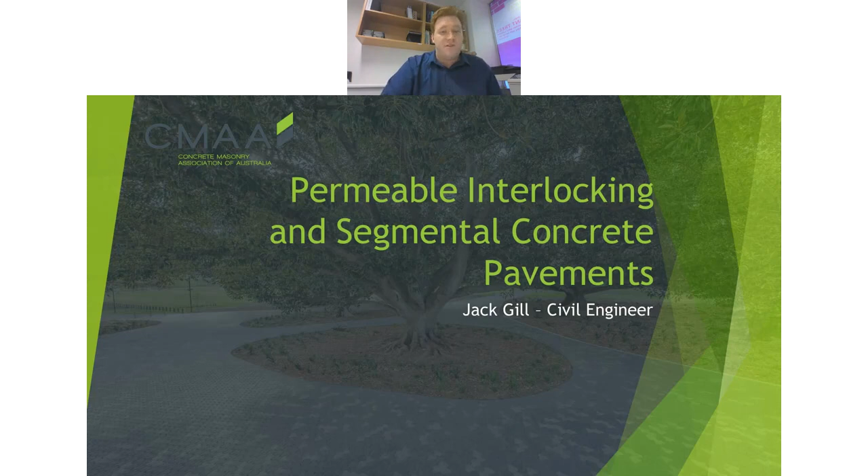So myself, my name's Jack. I'm a civil engineer here with CMAA, and I'm going to be taking you through a little bit about permeable interlocking concrete pavements, about why and how we should be using them, and a little bit about the design and specification of these pavements.

Firstly, I'd like to acknowledge that this is a webinar format, so I'd like to acknowledge the traditional custodians of the various lands from which all of our attendees are joining us today, and I'd like to pay respects to those elders past, present, and emerging across the nation.

So a little bit about what we're going to be talking about today. We're just going to quickly touch on what we do here at the CMAA, what a permeable pavement is and the different types of permeable pavements, why we might be specifying permeable pavements and specifically permeable interlocking concrete pavements, some of their uses, and then we'll go down a little bit into the design and specification considerations - talking about pavement type, material selection, as well as both your hydrological and structural mechanistic design. I'm hoping this will be a really nice overview of where we're up to these days with permeable concrete pavements in Australia.

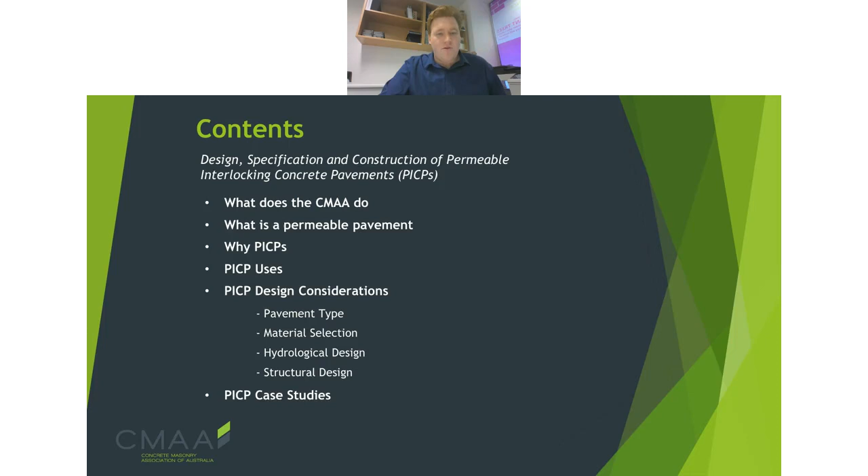So a little bit about who the CMAA is and what our mission is. We are the Concrete Masonry Association of Australia, and we represent all concrete block and paver manufacturers in Australia. It's essentially our job to make it easier to build in block and pavers. We want to develop talent in the industry, we want to facilitate important conversations by having webinars and discussions such as this, and we also obviously want to promote our members' products. And I can see in the chat box a few of our fantastic members have joined in.

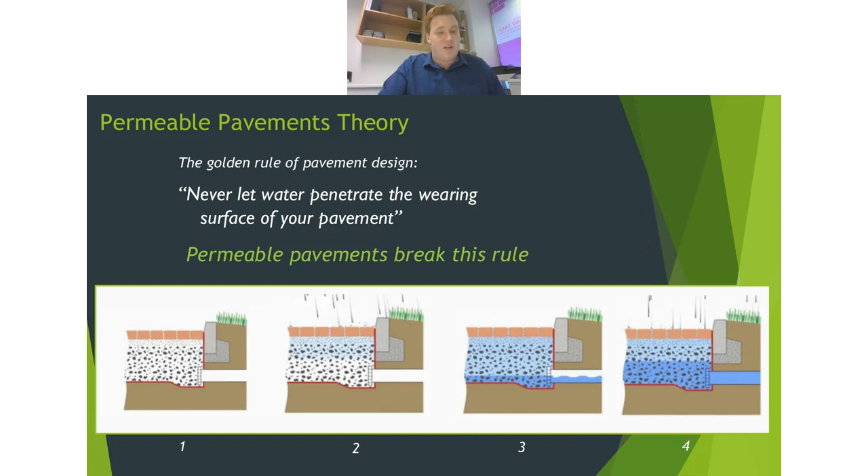So the different types of permeable pavements — there's generally three common types we see here in Australia that are beginning to be picked up. The first type is an open graded or porous asphalt, and as the name suggests, it's an asphaltic material that has some of that finer matter scraped out, which allows water to permeate through that surface.

Similarly, you've got a no-fines or pervious concrete, which a lot of people here would be familiar with, and again it's a similar theory. It's a concrete that's got a higher void ratio to again allow that water to infiltrate through the pavement surface layer.

And finally, we have our permeable interlocking concrete pavers, or PICPs, and that's the acronym I'll use for the remainder of this webinar. Essentially, as the name suggests, we've got a pavement system where the paver layer interlocks, so the units actually tessellate into each other. Either through the paver itself or through the joints between individual pavers, you allow water to infiltrate through that surface layer into the underlying pavement substructure.

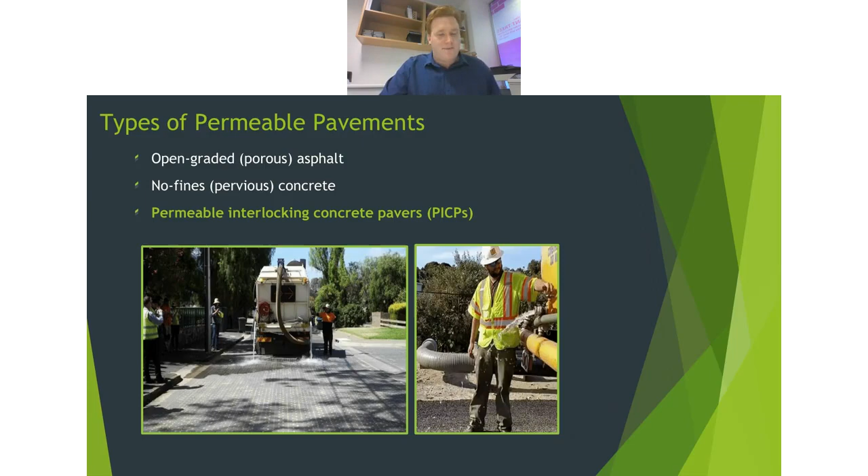So PICPs are a simple and effective solution, minimizing issues of clogging, which I'll get into a bit later, while maintaining the durability of your pavement itself. And obviously durability is massive - our pavements need to take the test of time and last. So this is where, if we think about how we're treating our pavements, these PICP products are likely to come out on top compared to other systems like porous asphalt and no-fines concrete.

I'll refer to an example that's been down for close to 25 years now, Sydney Olympic Park. That was laid on top of marshland, swampland, in the late 90s leading up to the Olympics in Sydney, using a combination of permeable as well as conventional segmental pavers. You can see that with good design, good construction, good specification, and adequate maintenance, you can have a pavement that looks as good as it did the day it was laid - and that pavement is approaching 25 years of age.

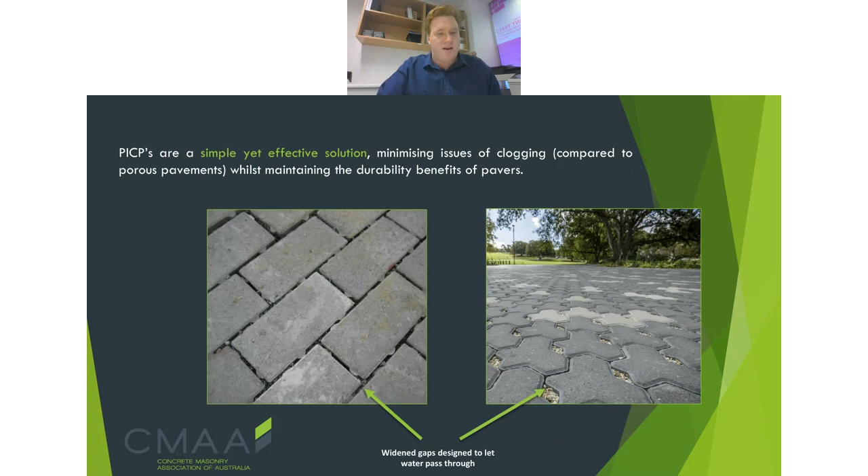So we have a bit of an idea of what a permeable pavement is now and how they function. I guess the next important question we need to be asking ourselves as engineers, as urban planners, as responsible citizens is: why PICPs? What's the win and what's the gain from using these systems?

And again, there's this idea of low maintenance - they are durable products that will last the test of time if designed properly. But I think some of the better benefits here are the idea of environmental friendliness, which I'll speak to in the next couple of slides, as well as the idea of traffic. We want to design precincts, pathways, and urban assets that are safe for people to use. One of the great benefits of segmental pavers is that because of that pre-cracked nature, because of these individual units, you get those little bumps where each joint lays. So as you actually drive over a segmental pavement, it induces vibrations into your steering wheel.

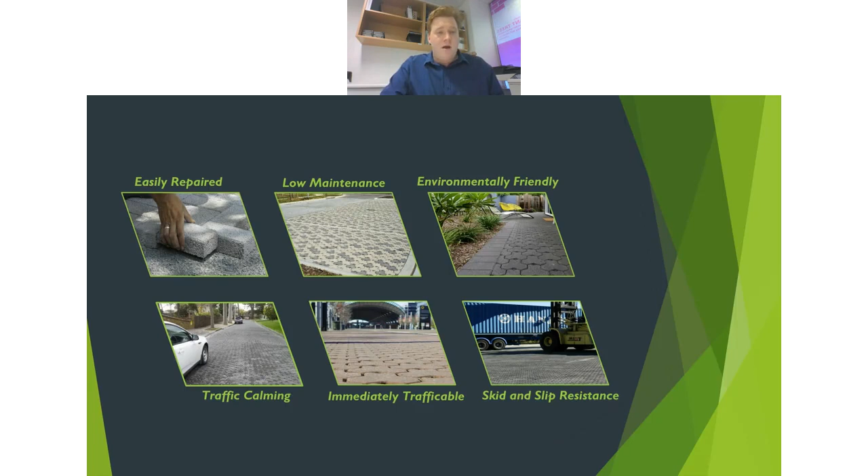As of April, I think we'd broken that. As of July, we're well above that at 1,500 mil. And as of October - still a month ago, and we've had a lot of rain since then - we were at 2,194 millimetres of rain, which was a new record for Sydney. Not a record we want to break, but one we have broken in 2022.

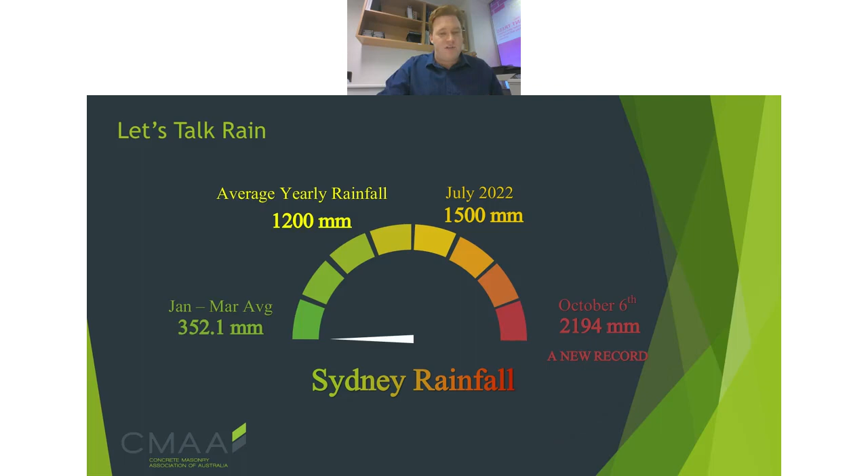So it really goes to show that in areas such as Sydney and Brisbane, we really need to be looking at trying to capture that rainfall, to avoid flash flooding and to be able to service the needs of the growing populations in those cities.

Conversely, in cities such as Adelaide, Melbourne, and Perth, where we don't get a lot of rainfall, we need to be a lot smarter about how we use and store the water that does fall in our cities.

A lot of the time, what happens when it rains in these cities across Australia is that it goes straight into a pit, straight into a pipe, and straight out to the ocean. It's the quickest and easiest way to get rid of that water to reduce the likelihood of flooding. However, that comes with the negative effect of not being able to actually store and use all of that water falling on our cities.

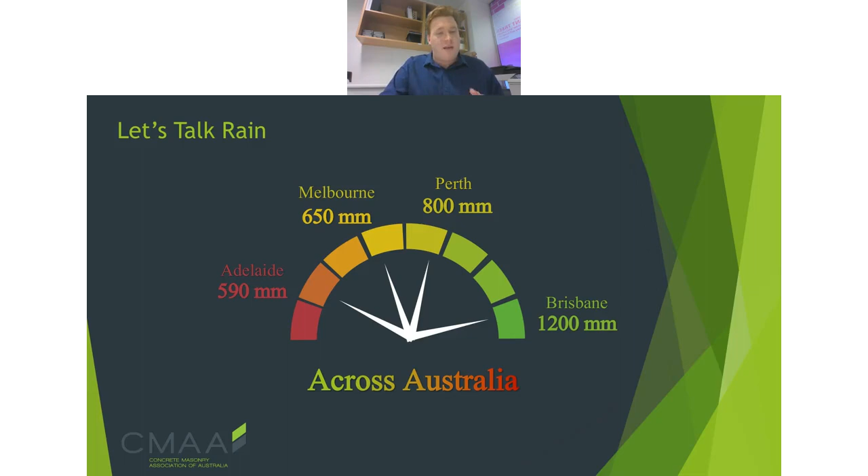So as one mechanism to think about how to be more sensitive with water sensitive urban design, permeable pavements are a key player in that. You can see my point illustrated from a couple of minutes ago.

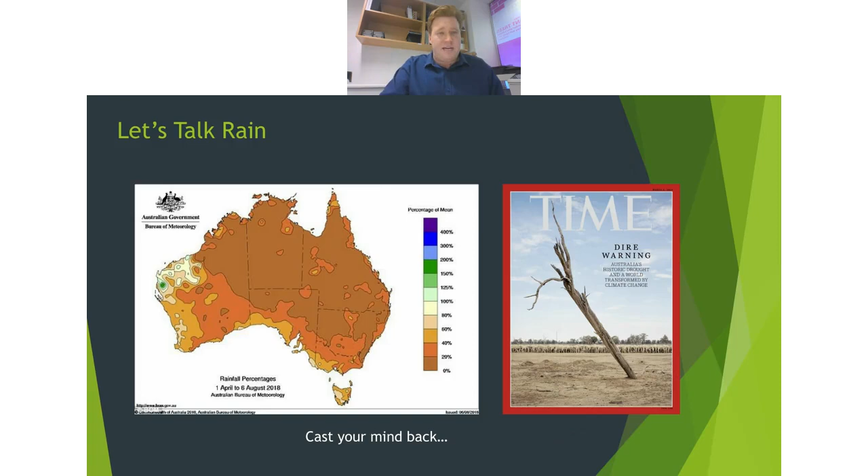If you cast your mind back a few years to the early 2000s into 2010, we actually had those large drought periods - this is in 2018, even a few years ago. And then for the next slide, I had dealer's choice of which photos to use to illustrate the exact opposite, where in 2022 we've had flood event after flood event after flood event.

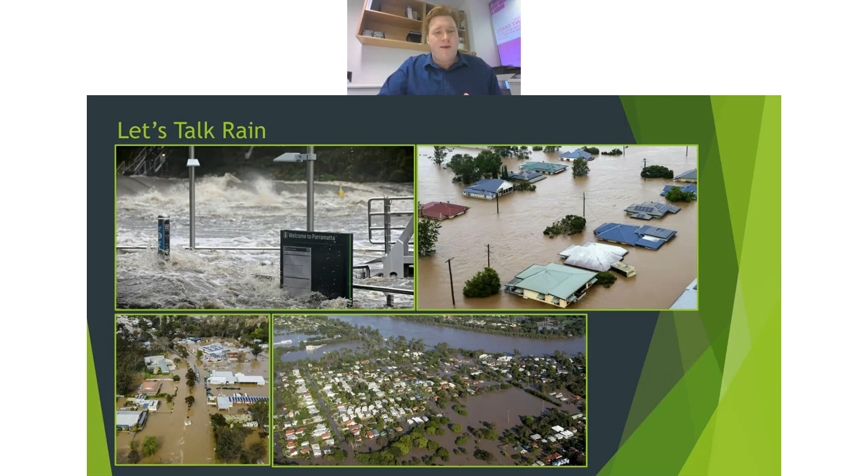So I think as Australians and as urban planners, we need to be a little more aware of how we're designing our cities. Our climate is changing, we're seeing more erratic patterns of weather, and because of that we need to start thinking about different strategies to design our cities in a more sensitive manner.

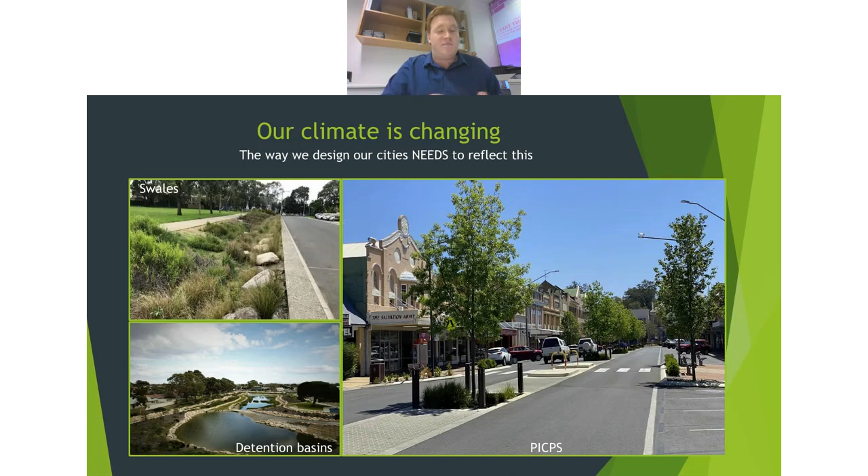You can see here a couple of examples of this: swales, detention basins, but more specifically the idea of permeable pavements. I've talked about the idea of water - I'm not going to delve too much into the idea of improving canopy cover.

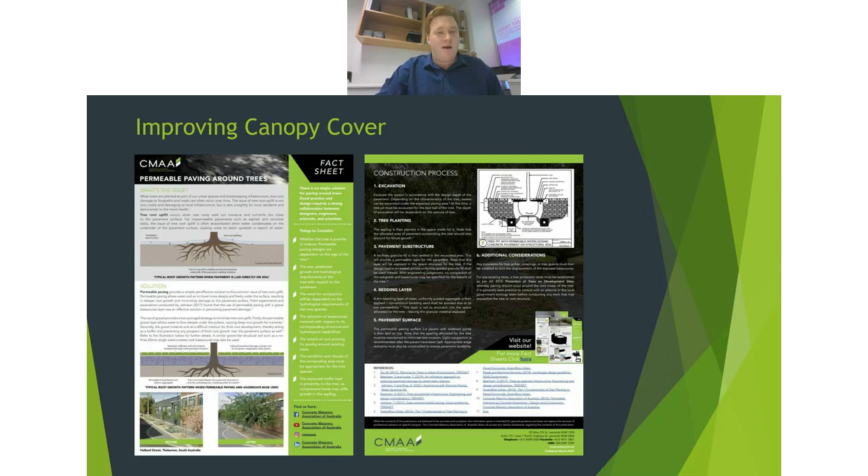This is something we've covered in a previous webinar, and I'm happy to talk about it more in a future one. But there is a really beautiful relationship between permeable pavers and trees. They can actually assist with the growth of trees, which is fantastic for improving canopy cover and reducing the urban heat island effect.

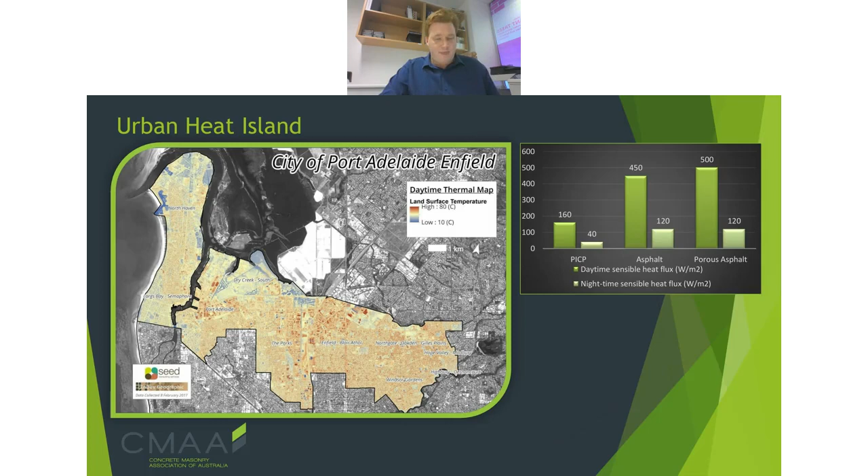So now it comes to the idea of where we can use PICPs and what are the best applications to start thinking about to get these into our communities. I've pulled out a few examples of where they've been used previously - a range of applications from a domestic driveway all the way up to factory and container yards. We've actually seen port facilities built using interlocking permeable segmental pavers. There's one in New York at Howland Hook that's a great example of using permeable pavements in a really high strength scenario.

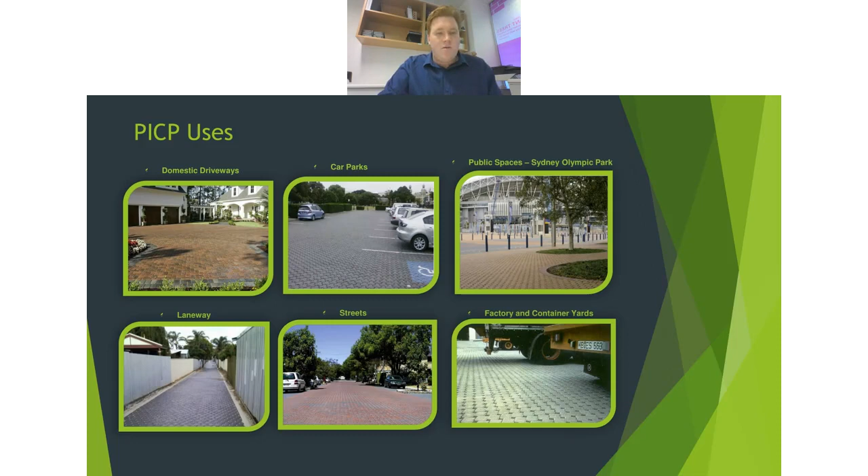So what I encourage you all to think about as a take-home today is what are the low-hanging fruits and opportunities for permeable pavers - not just PICPs, but no-fines concrete and asphalt as well. Because there's really no reason in Australia why we should be designing asphalt car parks anymore. There's a place for these systems where we can use our paved areas as a water-sensitive urban design asset, using that to either reduce and control flooding, improve the quality of our water, or actually store that water for later reuse. So something to think about during the remainder of this webinar.

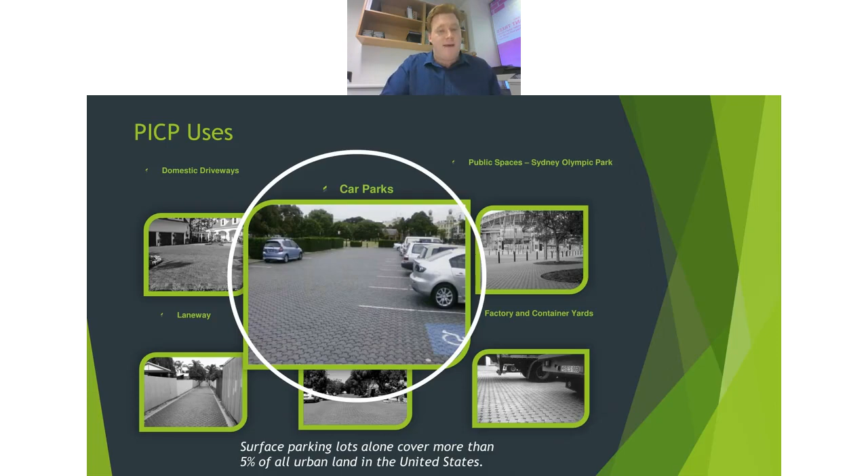So we've talked a little bit about the uses and the why and how of permeable pavements, but now it's time to get into the nitty gritty of how we actually go about designing and specifying these pavements. The first step is to have a look at a flow chart and the engineering design methodology behind pavement design, specifically permeable pavement design.

With regards to our design considerations, there are three key steps we need to fulfill to have a pavement specified and designed correctly. It starts off with your pavement type selection - this talks about your subgrade conditions, your type of cross section, what type of system you like, as well as the pavement materials.

So both your base course material, as well as your actual paver and upper surface layer material. We then would go down into your hydraulic analysis, as well as your structural analysis.

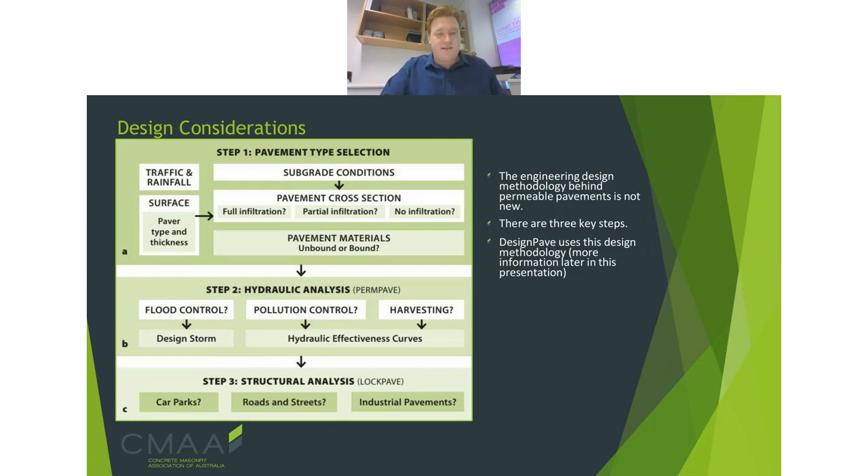So we're going to look at step 1, and we're going to look at subgrade conditions, as well as your pavement cross-section. The reason I've circled both of these options in this flowchart is that they really come hand in hand. A lot of the time, your subgrade or soil conditions will dictate the type of approach you'll use with regards to a PICP system.

Now you can see on top of the screen here, there's 3 key types of systems that we can employ here for a PICP. There's a full infiltration system, a partial infiltration, and a no infiltration system. As engineers, we like to keep things easy to understand, and the definitions for these are quite inherent to the function that they perform.

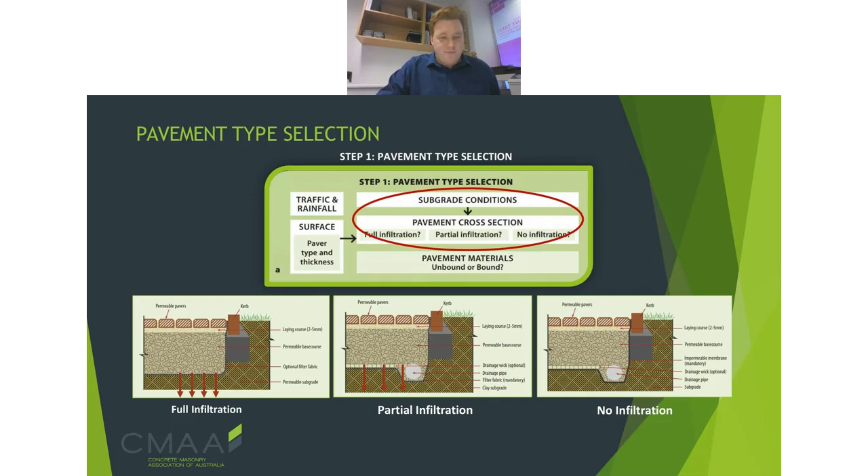So as a first step, we can look at our full infiltration PICP system. As you can see here on the screen, and as the name suggests, the idea of these systems is that we don't actually have any subsurface drainage infrastructure. What ends up happening is that any water that enters that pavement system through your upper layers will translate through your bedding material, through your base course, and back into your underlying subgrade.

The beauty of this system is that you don't actually have to have that drainage infrastructure. You don't have to put in your pits and pipes. Another beauty of this system is that it goes straight back into recharging your groundwater resources. So if that's a concern, then that's something these systems can be used for.

And you can see the final dot point underlined on this slide is that these are used when you've got a subgrade that's a non-cohesive granular material, so something such as a gravelly or a sandy soil. I'll get a little further into that in more detail as we progress.

You can see the different pieces of the pavement in this cross section here. You can see the actual pavers themselves, the base course, the laying course. You can see the subgrade, which is your underlying soil, and you can see your kerb on the right-hand side as well. I'll speak to all of these as we move through the design.

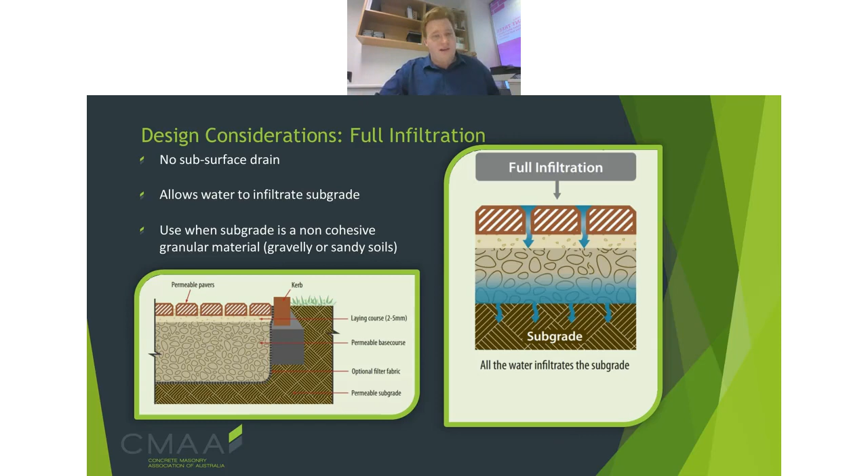Your next type of cross-section that you could opt for if you're specifying a permeable pavement would be a partial infiltration system. Again, as the name suggests, this allows for some infiltration into the subgrade, but it also allows for some water to be captured and either stored or pumped out of your pavement system. You can actually see that in these cross sections that we've got on screen here.

You can see that the key things you'd note is that you have a permeable geotextile or a sort of filter fabric that allows you to separate your base course material from your subgrade material, but that also still allows that water that's in your pavement cross section to get through to your underlying soil.

What you also have here that's different to the previous slide is that you have a pipe, and in some cases, a pump as well that can be used to pump out or take out that water and reuse it for an alternative application.

So what we generally mean by that is we'll insert a slotted ag pipe at the lowest point or at the bottom of our permeable pavement cross section. What ends up happening is you get this twofold movement of water, or two pathways, where one of them is that water going down into your subgrade, and the other is that excess water that you don't want going into your subgrade getting removed via that pipe.

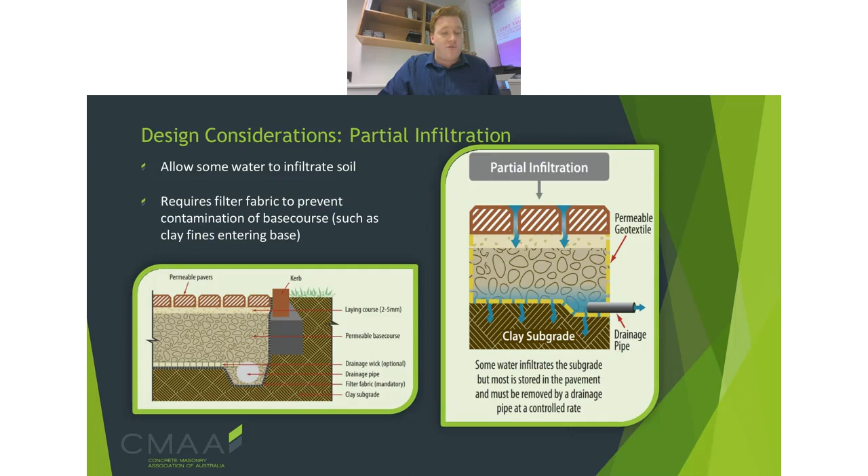You can see these will be used in some clay soils as well as some sandy soils. But you'll see where the difference lies over the next slide for your no infiltration system. And again, as the name suggests, for a no infiltration PICP system, you have an impermeable membrane that basically borders your whole system, and this doesn't allow any water that enters your pavement system to exit into the surrounding subgrade.

And so this really, if we're talking about analogies, this really is almost like the bathtub that I was referring to at the start of this webinar.

You get basically this detention basin essentially that can store this water, and then you insert your drainage pipe or your pump, and this essentially takes away all of your water that enters this system. You can take that away to a different part of your stormwater infrastructure, or you could take that to a tank and use it to water your gardens, water your footy ovals, as a nifty way of recycling any water that enters that system.

So where you might use a no infiltration system is where you've got contaminated soils or where you've got expansive soils, such as your highly reactive clays. That'll just mean that you don't have that water or excessive moisture entering that soil to cause that heave and cause that expansion and contraction.

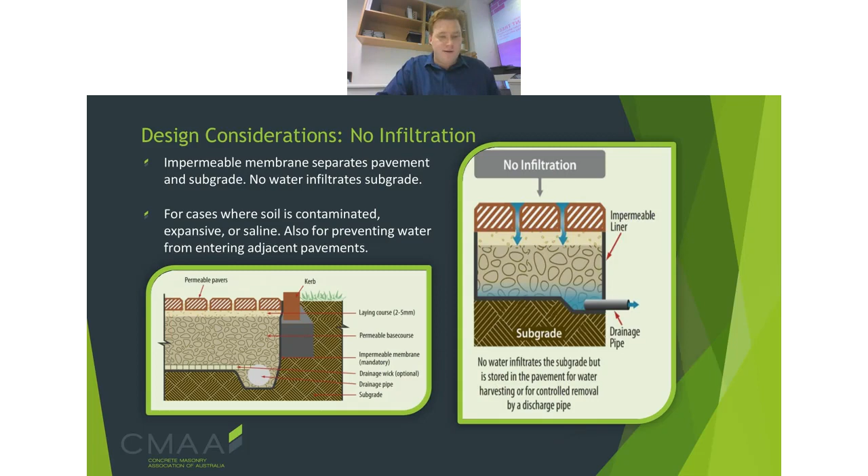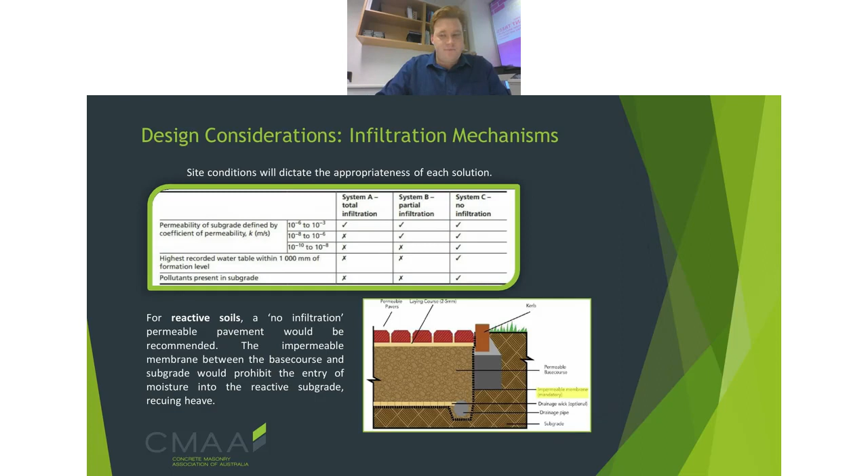You can see a little bit of an idea of the different types of subgrades that we might come into contact with when we're looking at designing our pavement. I mentioned that these subgrades are very much related and inherent to the type of permeability of your subgrade, as well as the type of system you'll specify.

In those scenarios, it might be completely fine to specify a full infiltration system, and that can obviously save you a lot of money depending on what you're attempting to do with your permeable pavement system.

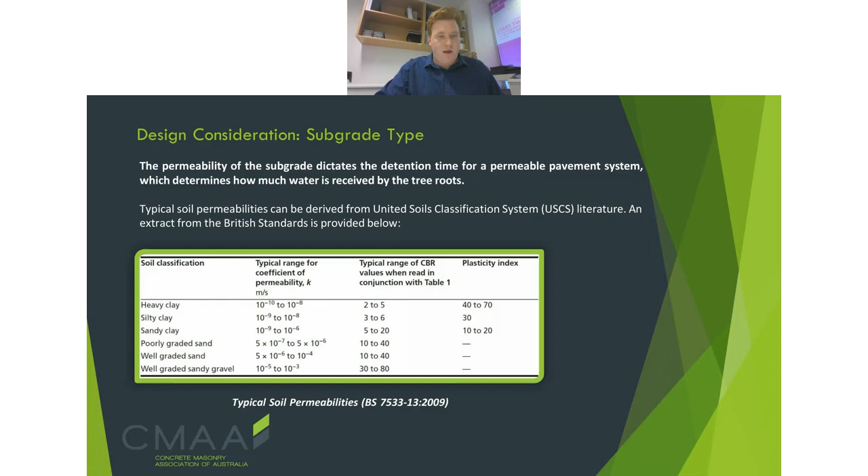In terms of pavement materials, we've talked a little bit about our subgrade conditions and our pavement cross-section and the different types of cross-sections we can opt for. Now it's time to talk a little bit about pavement materials itself.

Within a pavement, you obviously have your base course, you have your bedding course, you have your actual surface layer or your pavers themselves, and you have your jointing material that actually is poured between all those joints within the individual pavers. All of these things are really important to think about, and they do differ quite a lot from your conventional segmental pavement. It's really worth taking note of the different types of choices you'll need to make with regards to pavement materials.

First thing I'll talk about is this important relationship between strength, compaction, and void ratio, and the idea that as your base course strength increases, generally speaking, your void ratio decreases. That means that your ability to hold water decreases. Similarly, if you have a high void ratio, you will be able to hold more water that enters that system, but you won't have the associated sub or base course strength that you might desire.

So again, it becomes a bit of a balancing game between picking a base course material that can hold the amount of water you want to enter the system, but also be strong enough from a structural perspective to actually withstand all of the traffic loadings that your pavement is going to be subjected to.

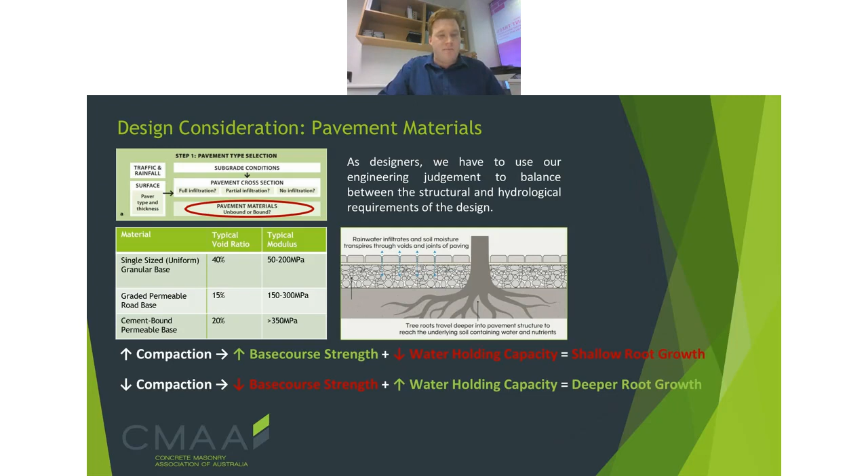We get a lot of questions here at the CMAA about whether, if you're not able to source this exact grading, you can use an alternative grading or an alternative base course material. The answer is absolutely—provided that material is strong enough and can hold the amount of water that you need it to.

I know we've had some questions, particularly from people in Perth, who have struggled to find this grading. So the answer is, if you have different materials available, you absolutely can use those, but you just need to have a look at how that's going to perform from a strength as well as water holding capacity perspective.

You can see there's a variety of materials here as well—it's not just your single size granular-based material. You've got different materials, including your cement-bound permeable materials that can be used as a base course material. It's dependent on what you, as a designer, want to specify for that pavement.

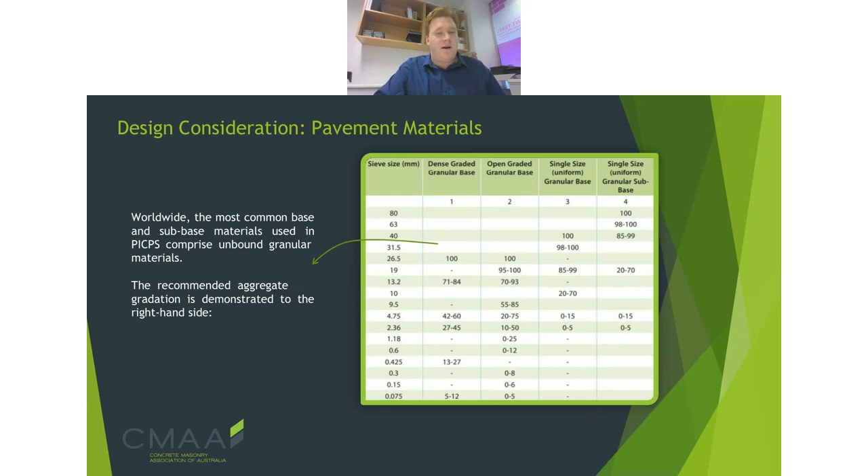By trafficable, I mean if it's going to have vehicles using that pavement. For different materials, for your subgrade, you'll need to compact up to 92 to 96%. For an unbound base material, you might need to compact to 98%.

What I will say is that, as I mentioned before, there's a relationship between permeable pavements and trees. If you're looking to have trees growing adjacent to your permeable pavement, you might find that this value may need to change to allow that tree to grow healthy roots. As a designer, it's up to you to determine whether or not you can get away with having less compaction for that tree.

But generally speaking, this is where, as someone working at CMAA, I'd say you can have a look at that and maybe come up with a novel solution—where you have a pedestrian pathway adjacent to these growing trees, next to, let's say, another permeable pavement that's actually compacted for trafficked applications.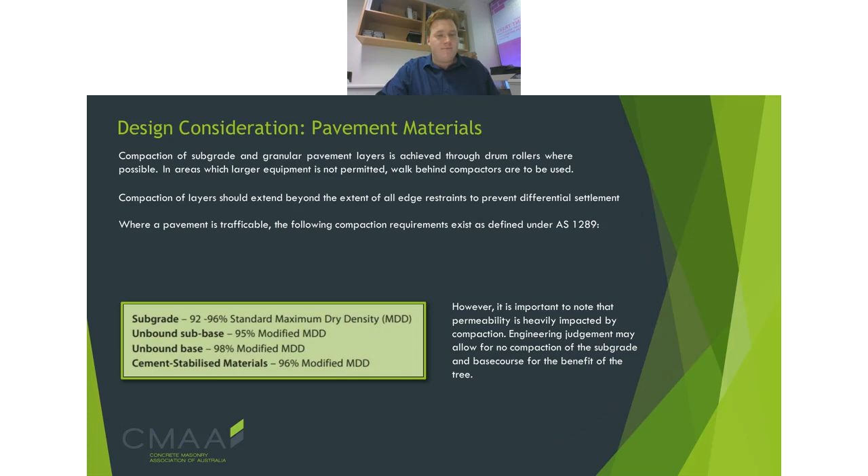So we've talked a little bit about pavement materials and some of the types of materials we can use for our base course, for our structural base course that will often form the base of our structural system. But obviously that's only a small portion of the system itself. We need to think about the actual pavers and we need to think about the bedding and jointing material.

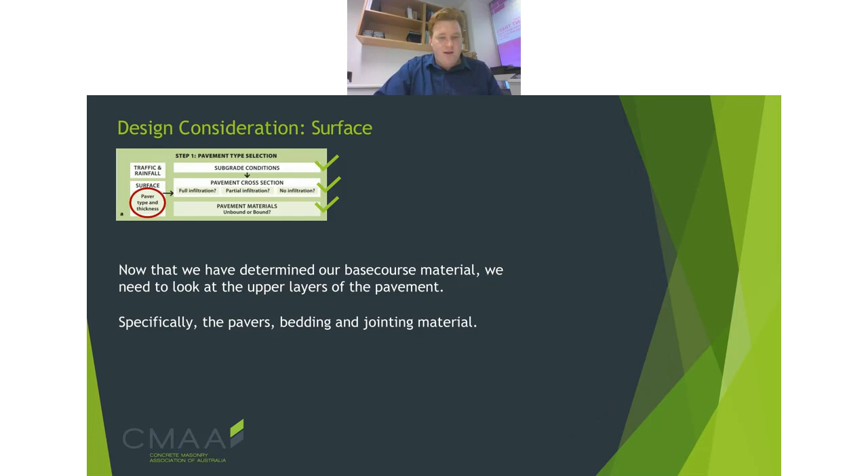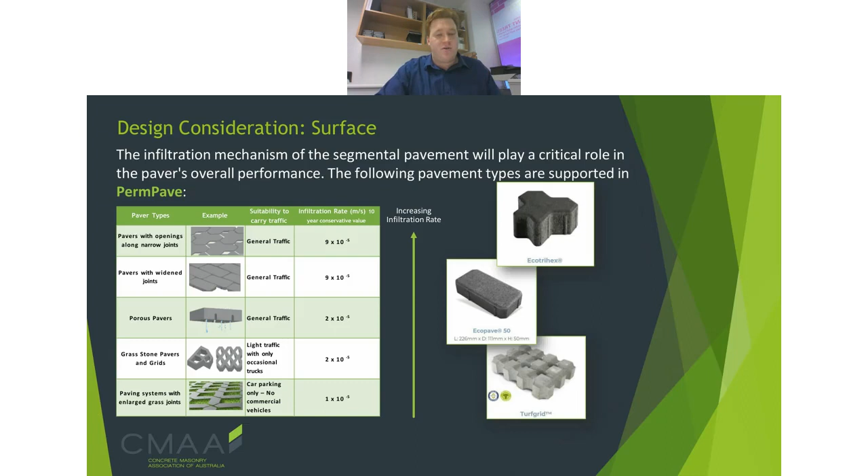You might think, if you're designing a pedestrian pavement, that's fine, I can use a 40 mil paver. But I urge you to think about whether that pavement will ever need vehicles on it, whether that's to clean it, sweep it, or for emergency vehicles. If you're ever going to have a vehicle on that pavement, then generally speaking, that's now become a trafficked pavement, and you'll need to select the appropriate thickness paver for that application. So just something to be aware of when you're looking at what a pedestrian versus a trafficked pavement actually is.

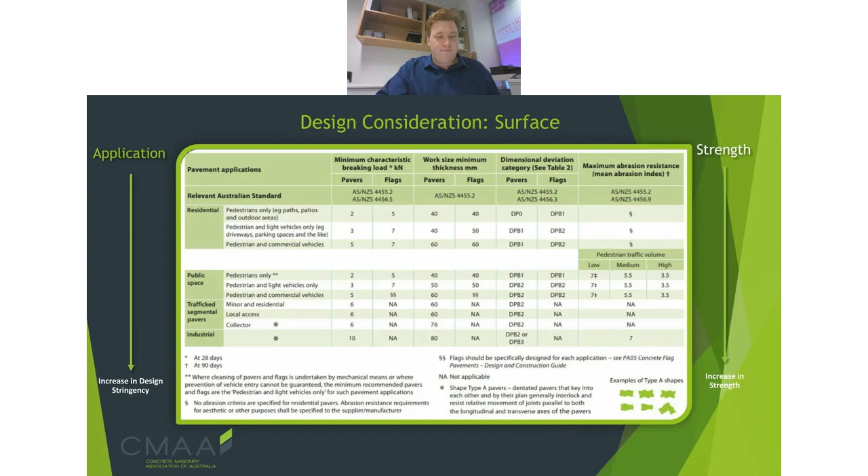Now, the next thing to consider, once we've got our base course material and our paver material, it's time to think about bedding and jointing. Bedding material is essentially the material that you will lay your pavers on, the material they sit on. Jointing material is that material that will fill each of the individual joints between the pavers. Generally speaking, a 2 to 5 mil uniformly graded aggregate is what we'd recommend here at the CMAA for a permeable pavement. For jointing material you could also use the same, or you might use a 1 to 3 mil aggregate, which has been popularly used in Europe.

My one piece of advice here, if you take nothing else from this slide, is do not specify sand in your jointing or bedding material, because sand doesn't have the void ratio necessary to quickly absorb that water fast enough to get into your pavement system. That essentially becomes the point where your pavement will clog up and cause pooling on the surface. So remember, in a conventional pavement it's fine to use sand for segmental pavements, but for a permeable interlocking concrete pavement, you need to use an aggregate, because that will give you the required infiltration to get that water into the system.

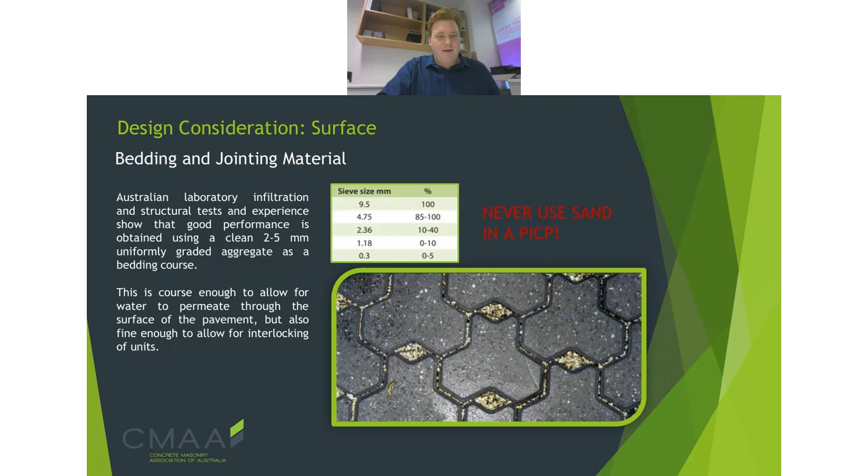Now, a common question we get here at the CMAA, my number one question, and it's a great one, is: will they clog over time? Will your permeable pavement in those upper layers, as leaves fall and people drop cigarette butts onto the pavement, will all those small gaps eventually become clogged up with organic material and pollutants, so much so that it won't be able to infiltrate that water fast enough into the base course?

That conservative value at the 10-year mark is what we actually use as our ongoing infiltration rate for pavers when designing a segmental pavement. What happens is that when you lay the paver, during the first year it's actually overperforming by a very high degree, and then over time it'll slowly naturally clog up. But that's not taking into account any maintenance. If you're sweeping your pavers every 6 months to a year, that value immediately goes back up to its peak infiltration rate, or close to it. So the answer is, if you design for a conservative infiltration value, your pavement will perform above that value at all times and you won't get that associated clogging.

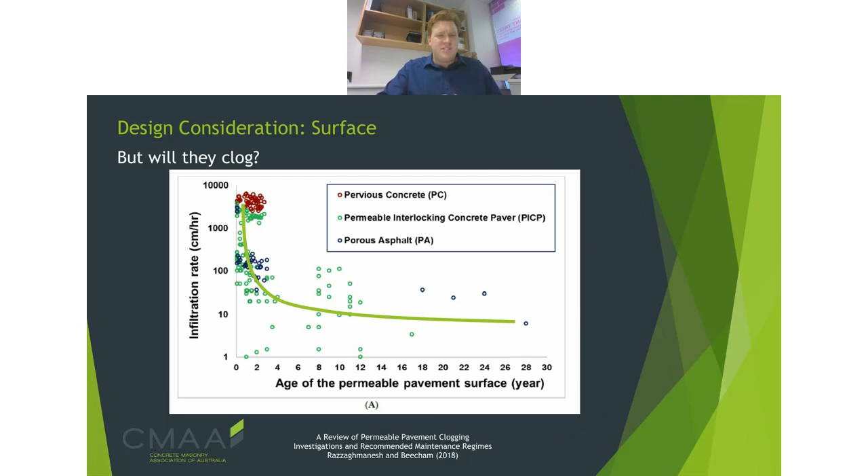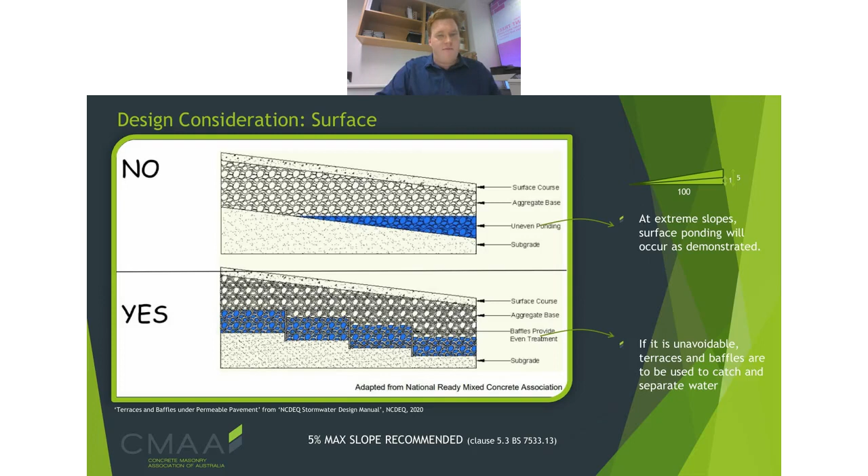Another thing to think about with regards to surface is a sloped pavement, and how we treat a sloped permeable pavement. This is a great example from the National Ready Mixed Concrete Association in America, showing what you can do with a sloped permeable pavement. You can put in barriers that separate and mitigate uneven ponding in your pavement surface, using terraces and baffles to separate that water outward. As a general rule, we recommend a 5% maximum slope, and anything more than that, get design advice to determine if the system is feasible. Generally, anything between 1 to 5% slope is permissible for a permeable pavement and is quite easily achieved.

So we've done our pavement type selection now, going back to our flowchart. Now it's time to think about our hydraulic analysis and talk about what our system's actually trying to do. There are 3 options of what a permeable pavement can specifically be designed to do: flood control, pollution control, and water harvesting. I'm going to touch on all of these.

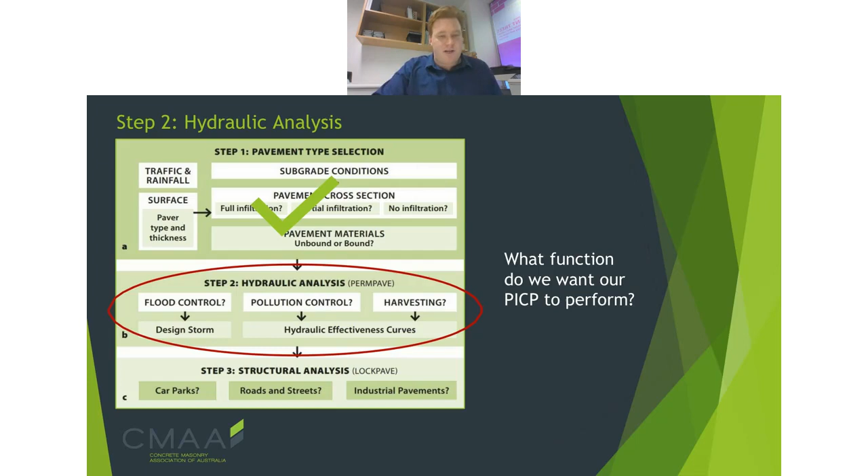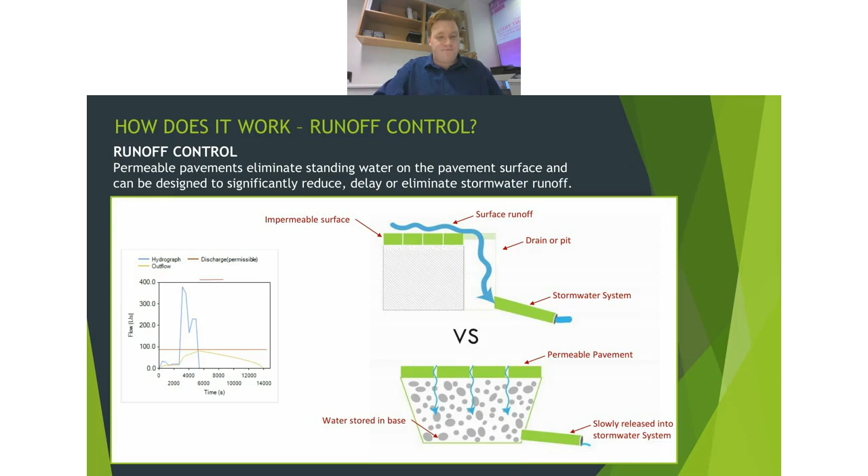Second is water quality improvement. All local government areas in Australia now have water quality targets they need to meet with regards to water pushed out into stormwater systems or reservoirs. The idea of a permeable pavement, specifically a PICP, is that it works through mechanical filtration. The water falls down your pavement system, and pollutants like small TSS, nitrogen, and phosphorus attach onto the sharp angular pieces of base course material, so you end up with cleaner water coming out the other side - think of it like a Brita filter. Any pollutants that remain in the base course can be broken down through bio-organic action, so you end up with a big water filter. Depending on the pollutant load you want to reduce, you can alter the thickness of your base course and the length of your filter to reflect that.

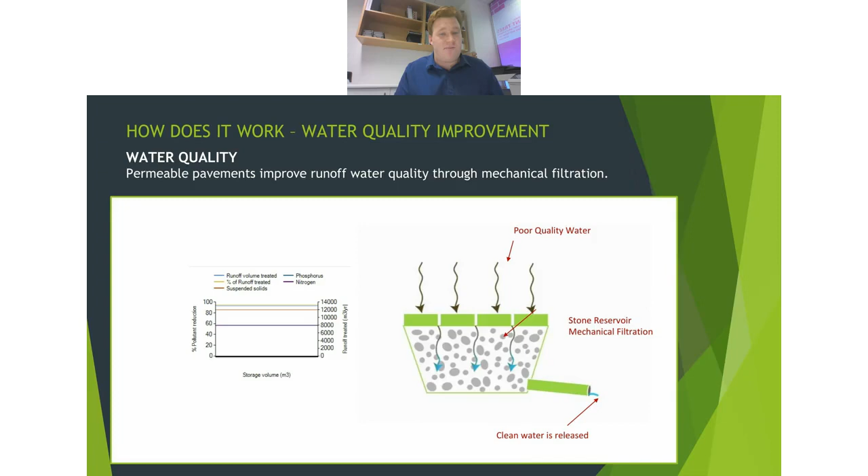And finally, water harvesting. The idea of this one's pretty easy to understand. Your pavement system is your storage tank, and it takes your water, and then you can pump that out and use it to put into a water tank and water your gardens and water your ovals. The thickness of your base course determines the actual amount of volume that your system can store, so you can alter that to fit your water demands.

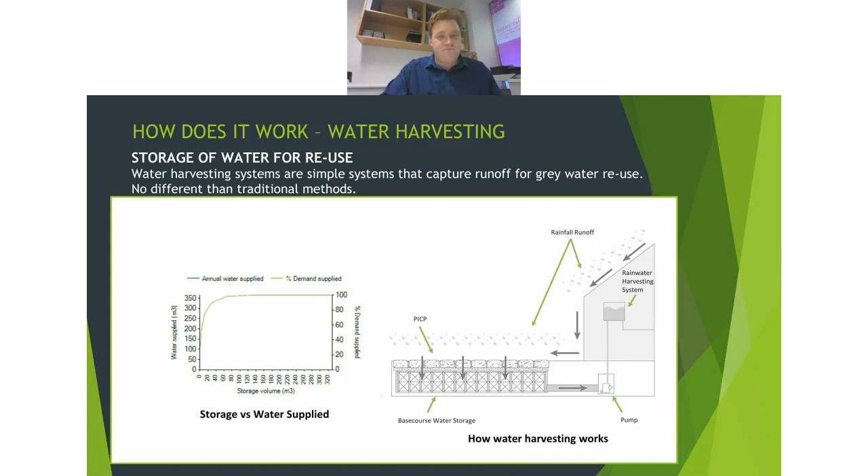The great thing about all three of those different types of systems is they actually work in combination with each other. You can design a system specifically for one of those, but inherently it's going to perform pollution control and harvest water at the same time as reducing the likelihood of a flood event. The beauty of all three is that there's software available you can use to design those, to determine what your base course thickness is going to be.

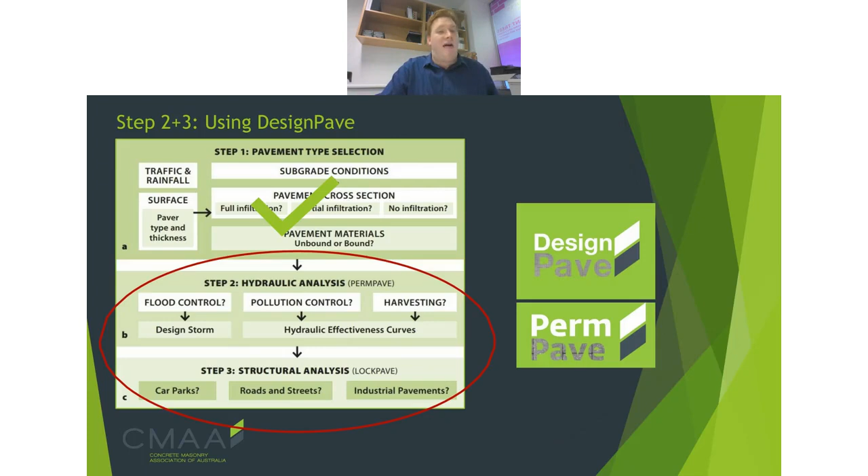In the interest of time, I'm going to go through Design Pave and Perm Pave in an expedited way, and give you an example of how it might work for a runoff control option. If you remember going back to step 2, there's flood control as an option for what your pavement function can perform. I'm going to show you how that might present itself and how that might look.

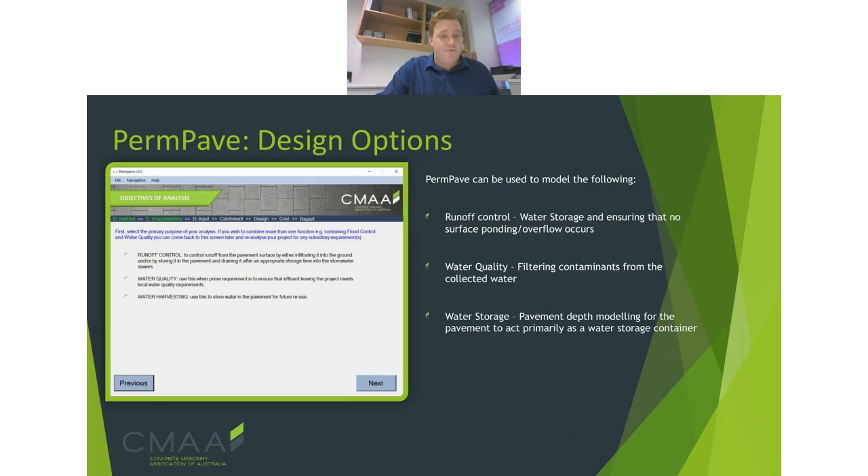You can see here on PermPave, the software gives you all three of those options as your main hydrological testing methodology, so you could select runoff control. Essentially it uses data from the Australian Rainfall and Runoff Guidelines, and it'll use your IFD curves from, at this point in time, the major capital cities of Australia. In future revisions of the software, we're hopefully going to have IFDs across the whole country. You can use those to assess what sort of design storm your pavement needs to withstand and how thick your base course needs to be to withstand that amount of rainfall.

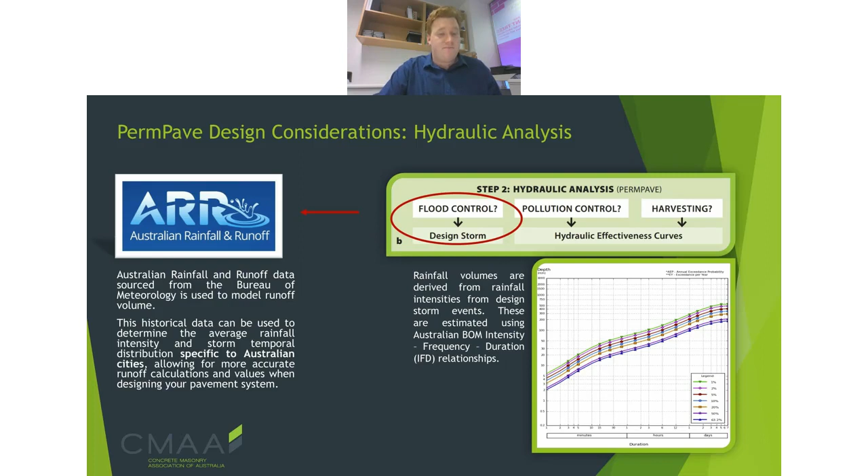The design methodology is really quite simple if you break it down. It's basically a bucket with a hole in it methodology. So you're filling a bucket and it has a hole in it, and the idea is that you want this bucket to be large enough so it can handle all of the inflow while still being able to have that constant outflow and not overflow. If your bucket overflows, your pavement has pooled and your pavement has failed. That's the methodology the software uses to model the pavement.

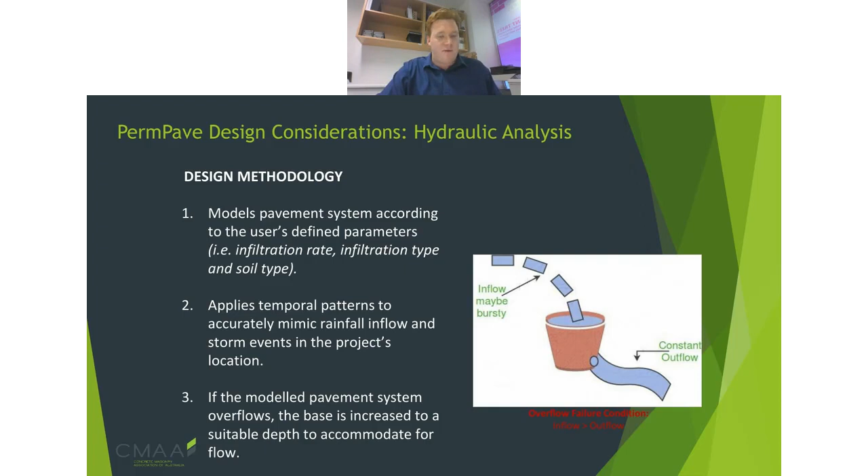You can see some screenshots here of how it works. And again, if anyone wants a demonstration on DesignPave and PermPave specifically as a next installment of this webinar series, that's something I'd love to do, so feel free to let me know.

You can enter some of your different storm durations, and you can enter whatever your target peak outflow is, or you can enter a runoff coefficient, and it will test your pavement inputs. It'll test whatever pavers you've put in, whatever base course material you've put in, whatever bedding course you've put in, and it will tell you whether or not your pavement will perform from a hydrological perspective. And if it fails, it will tell you to go back and adjust those parameters so that it will actually work and you won't get that pavement failure.

The same is true for both the water harvesting as well as the water quality. You'll input your parameters for your thickness, your target coefficients, if you're reducing your pollutant loads or trying to store a certain amount of water, and it will tell you whether or not your pavement's going to perform from a hydrological standpoint.

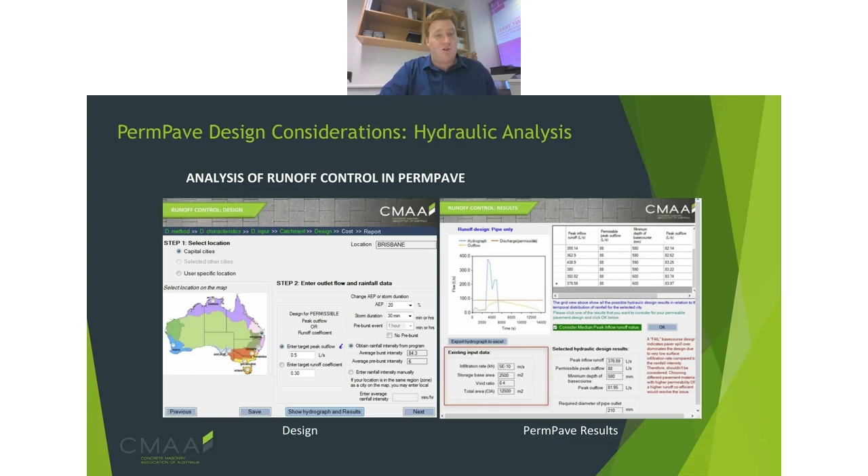Again, you can see a bit of a summary of that. This is that same hydrograph that I pulled earlier, but you can see that the goal, regardless of the hydrograph, is to ensure that the outflow never exceeds the discharge. That's that idea of the bucket with the hole in the bottom. If you achieve that, then your pavement will work for that given design storm and it will perform for that given design storm.

Depending on the type of asset you're designing, whether it's a driveway, a car park, or a road, you might have different design storm conditions, different exceedance probabilities that you'll need to take into account. The beauty of the PermPave system is that it takes into account all of those different exceedance probabilities to allow you to calculate for different types of assets.

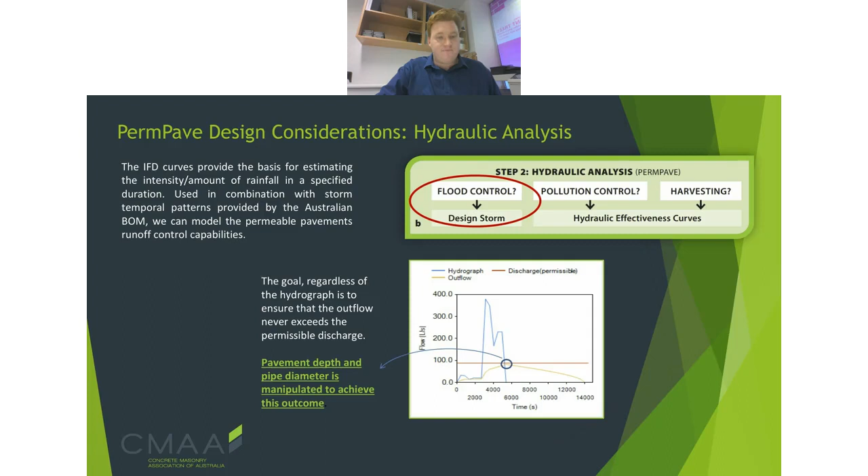The last thing to think about with regards to runoff control is that you don't actually have to have all of your pavement area be permeable. If we think of permeable pavements like a drain or a bathtub, this diagram in the bottom right sums it up really well. You can actually have a large area of impervious pavement, whether that's asphalt, concrete, or conventional segmental pavement, and have that all directed onto your permeable pavement.

The beauty of this is that you can use some really easy equations to calculate the volume of water that would fall onto that area, and PermPave actually does that for you. You can enter what your areas are, and it will tell you whether your system can withstand those different amounts of rainfall, depending on your ratio of impervious to pervious areas.

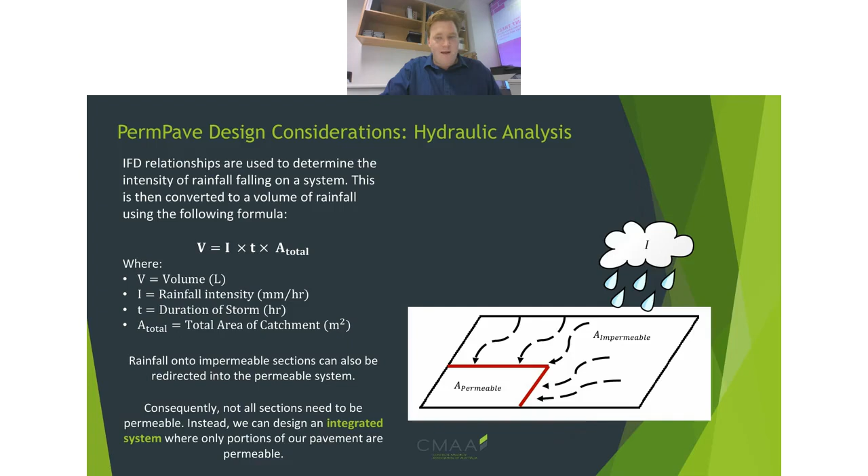As a rule of thumb, there's a recommendation that your ratio should be about 2 to 5, pervious to impervious. You might have a footpath directing onto a segmental permeable pavement that absorbs all the water from both. But you could really alter this ratio to whatever you wanted, provided you get a system that can withstand the amount of water falling onto it. So you can play around with those different volumes and determine what's actually going to work.

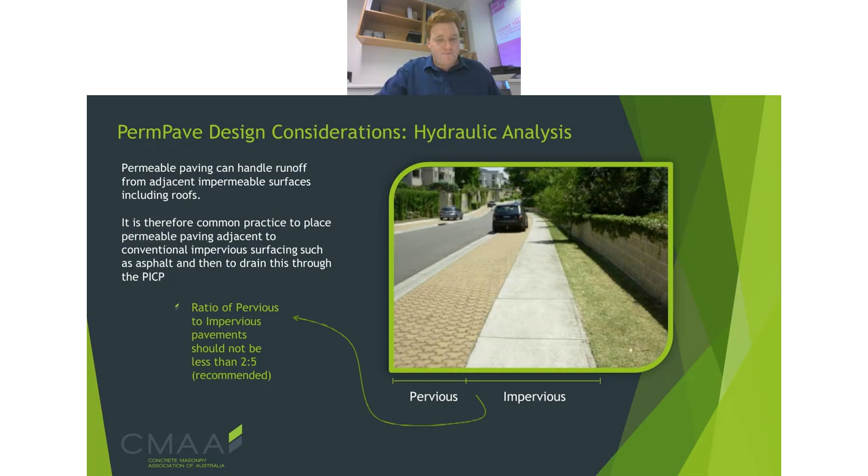As a final step, we've talked about our hydraulic analysis, and we know that our pavement works from a hydrological standpoint. Now we need to make sure it performs from a structural standpoint, and that it's going to withstand all of the loadings that are going to be placed or imparted onto the pavement.

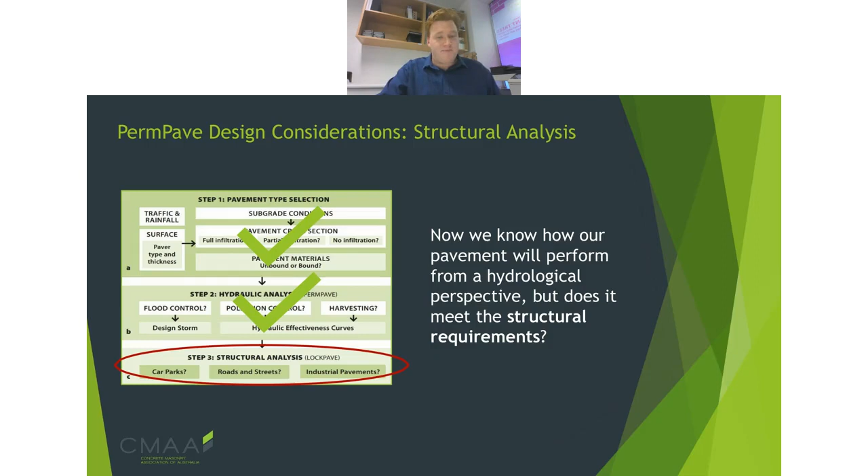Permeable pavements are generally modeled as flexible pavements. This means the deformation applied locally is going to be distributed to a much smaller section compared to a rigid pavement, such as concrete pavements. These diagrams showcase how those loads are actually dispersed onto the surface layer of a segmental pavement, and this is the same for impervious as well as permeable pavements.

You can basically understand that the larger the depth of your base course, the greater the zone of influence, which means you have more capacity to withstand those heavy loads.

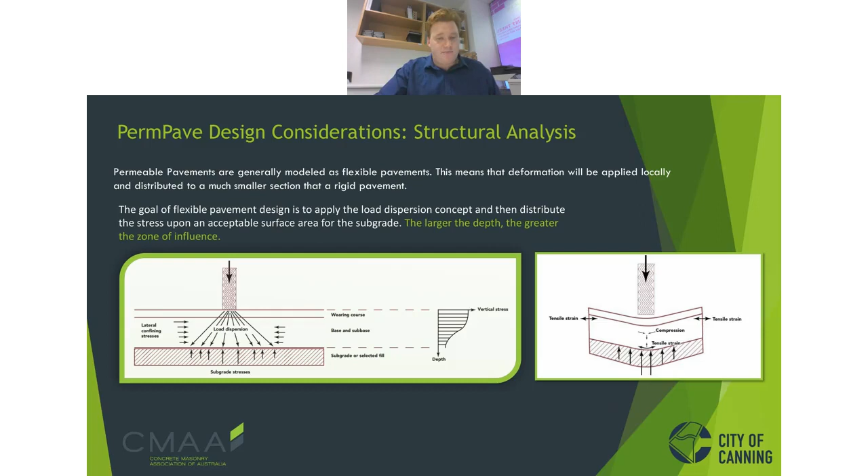The CMAA, through research we did in previous years, found that the failure criteria for flexible pavements modelled in Austroads is not actually representative of a segmental pavement specifically. Instead, we recommend, and the DesignPave and PermPave software use, a shell design procedure for segmental pavement design, which we find models how that pavement performs in a better and more suitable manner.

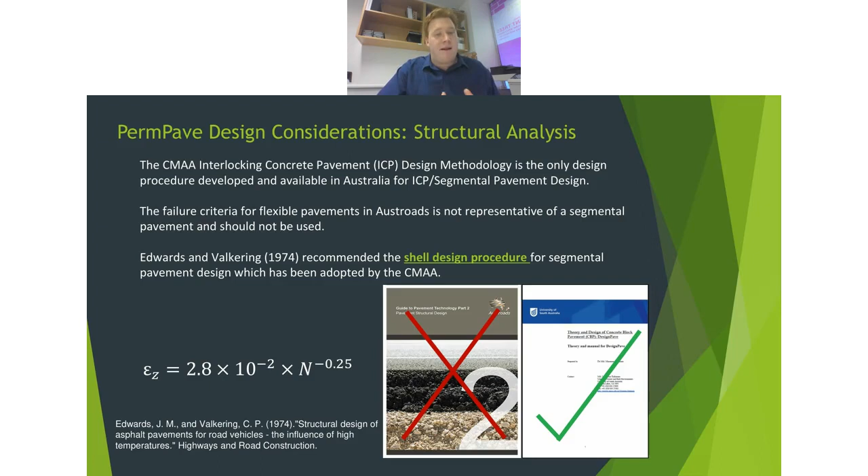In a layman's perspective, what it essentially does is convert all of the layers within that pavement to an equivalent thickness of your subgrade material. It manipulates those thicknesses out using Odemark's theorem and puts it into one cohesive thickness for you, so you can then do your stress and strain calculations to determine whether your pavement thickness is able to withstand those loads.

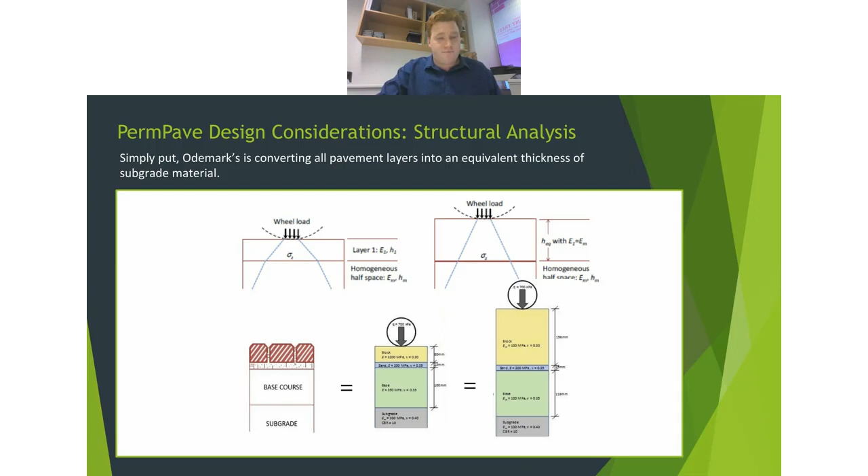I'm not going to get into the nitty-gritty of all the back-end analysis, but all of this is available for you to look at and understand the formulae and equations behind how it works. You can use the Boussinesq stress theorem to impart all of those vertical, radial, and tangential stresses to determine the amount of repetitions or traffic that can be subject to your pavement.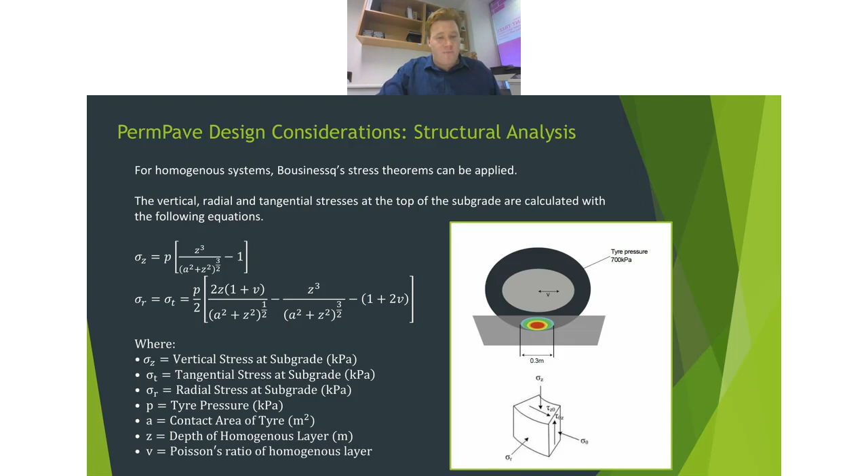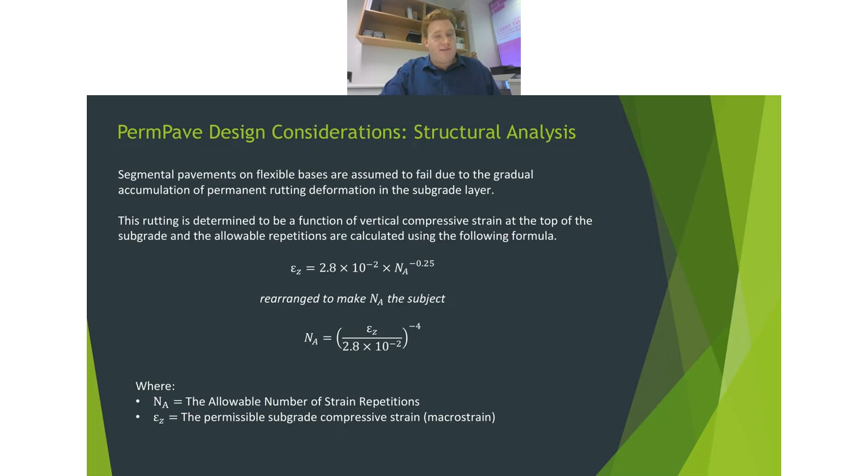You can rearrange and manipulate the formulas to get your allowable number of strain repetitions on that pavement, which translates to the amount of repetitions you might have using the pavement system over its intended design life. From the front end, you can essentially input your equivalent standard axles, the amount of traffic subjected to your pavement, or your annual average daily traffic.

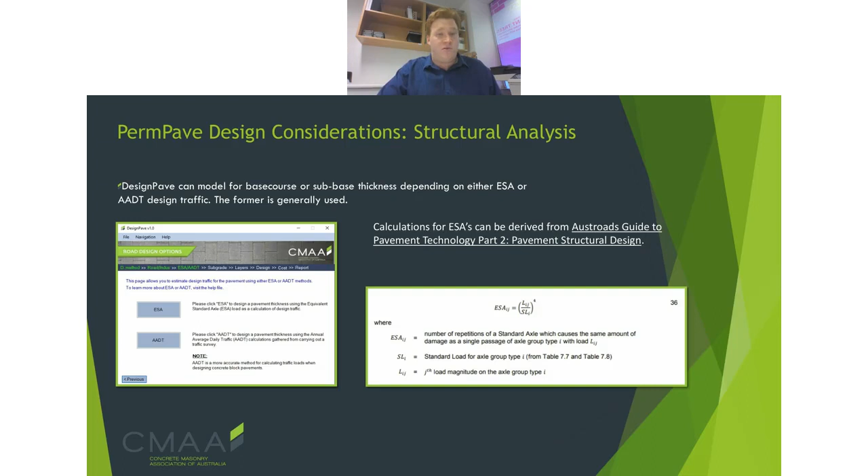If you have a traffic spectrum of who's using the road or who's using the car park, you can input that. Then, based on your subgrade, the strength of your base course material, and the strength and thickness of your pavers which we've already decided in previous slides, the software can calculate your base course thickness to withstand those allowable repetitions or that traffic that you want your pavement to be able to model for.

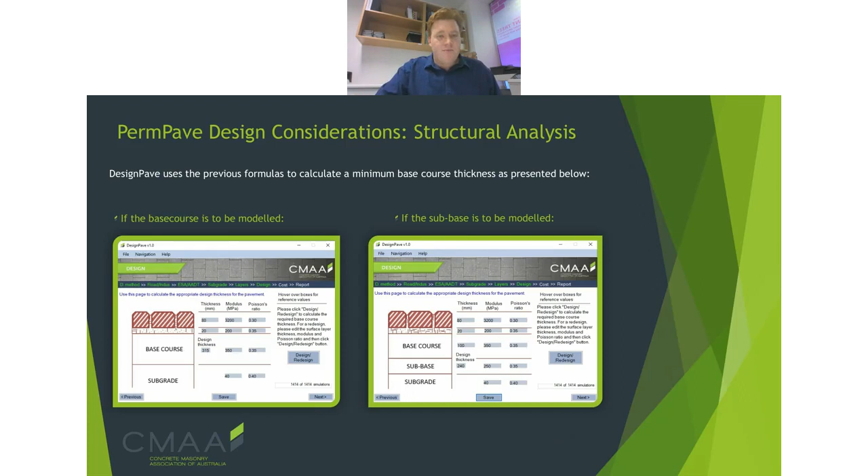So, it's a lot of information to impart, and I encourage you all to have a look at the PermPave and DesignPave software and ask us any questions you might have regarding it. But what does a pavement actually look like? What do these look like when they're completed, and how do they present themselves?

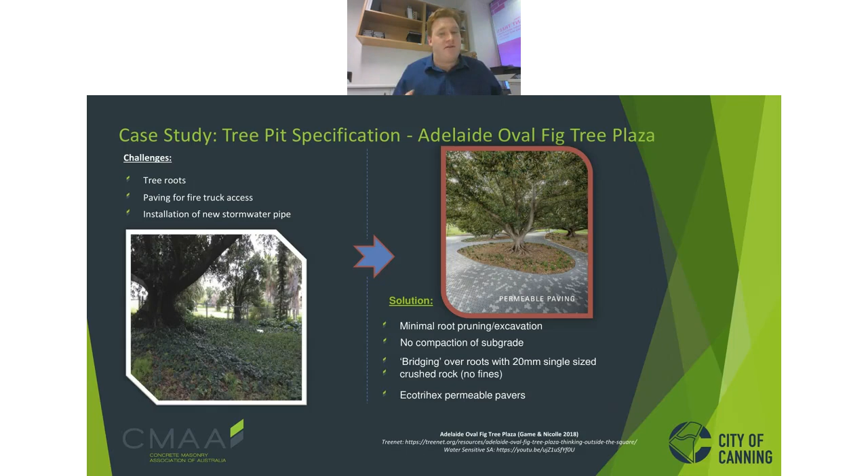Just a few examples to finish this off. This is a case study we showed to the City of Canning in Western Australia, the Adelaide Oval Fig Tree Plaza. You can see a before and after of this environment. They wanted to make a pavement that would infiltrate all of the water falling on it to help those trees grow and promote healthy growth, as these trees were over 100 years old. So they used a permeable pavement system with Adbri masonry eco-trihex pavers, allowing the trees to remain without causing the uplift that trees can sometimes cause with conventional pavements.

Another example that talks to what I spoke about at the beginning of this webinar is using them for shared zones. This is a project in West Perth where they wanted pedestrians and traffic to use the same zone and interact safely. They found that the pavers themselves, through their patterning, created designated zones for pedestrians and cars. The idea of permeability also allows it to act as a water-sensitive urban design asset.

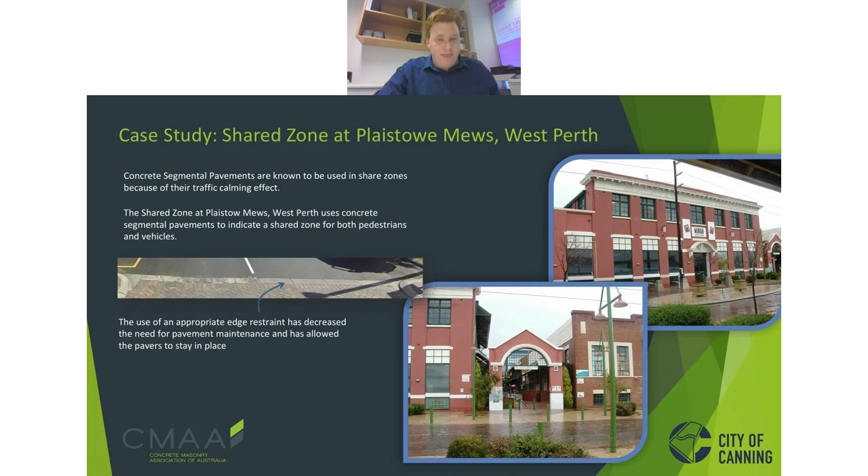A personal favourite of mine is this project in West Torrens in Adelaide, a pavement with all these trees lining the street. The engineers and urban designers modelled the pavement to sit directly underneath the drip line of all the trees in the street, so that any water that hits the trees and intercepts through to the ground is recycled into the pavement. This can be used to recharge and assist with the growth of all those roots for the trees right next to the pavement.

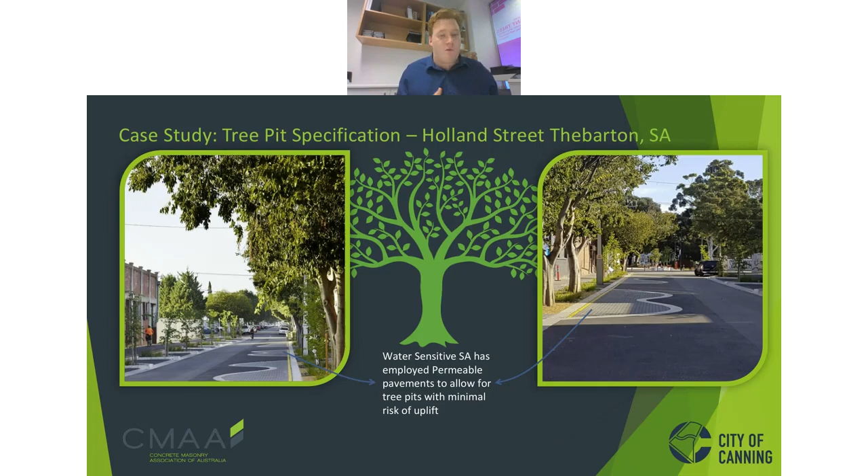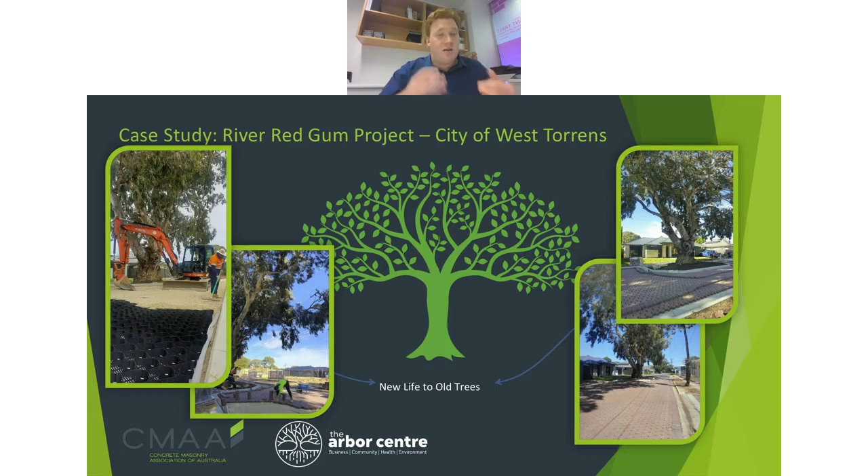So, just a little summary of what you now know as we're nearing the end here at 12 o'clock. You should now know what a permeable pavement is, where and how they can be used, and some of the benefits, as well as key specification and design parameters you need to be aware of — specifically the materials used for a permeable pavement, and the associated design process for a segmental pavement, whether hydrological or structural design, so you can see how they work. And now you understand a little about how the DesignPave and PermPave software works. This is something I'd like to touch on further in future webinars, so I'd encourage you all to attend those.

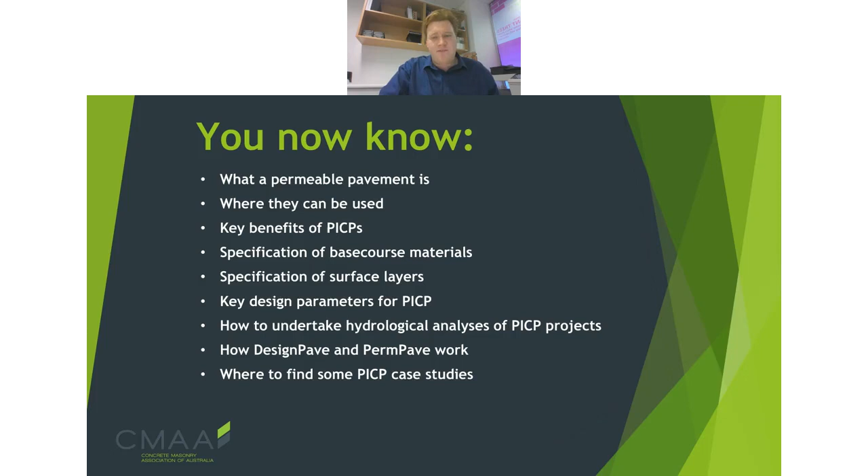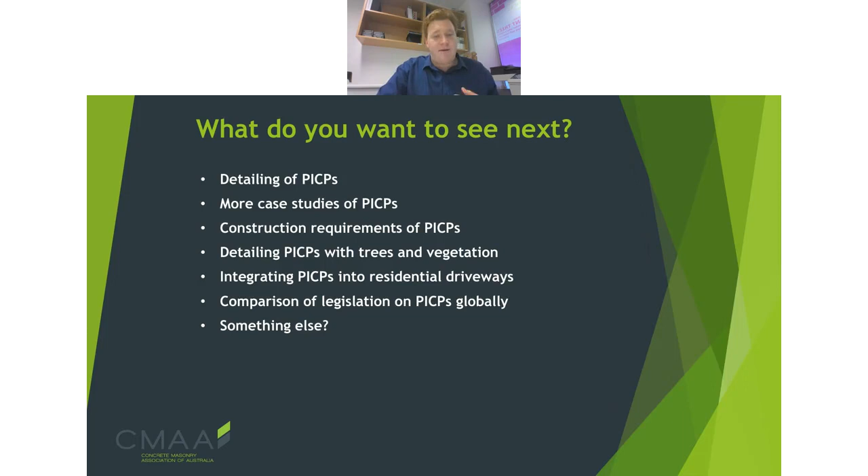Now, my question is probably a little bit, what do you want to see next? I've got a poll up here that I'm happy for you to answer. I'm happy to cover detailing of permeable pavements, more case studies, integrating PICPs into driveways, more topics on DesignPave, and PermPave software itself, which I don't think I've put in the poll, but if you want some of that, please let us know and we're happy to touch on that in future webinars.

Steve's got a great question on any comparisons of embodied emissions in PICP systems versus conventional systems. I believe there are some out there, but none that are Australia specific at this point in time. What we're attempting to do at the CMAA is actually try to commission a study that looks at what the embodied emissions are of those two systems. What we do know is that generally the maintenance requirements for PICP systems are a lot lower than conventional asphalt systems, if designed and specified correctly. So with embodied versus recurrent emissions, we're likely to find that in a segmental system, whether permeable or a conventional concrete segmental system, those recurrent emissions are likely to be lower.